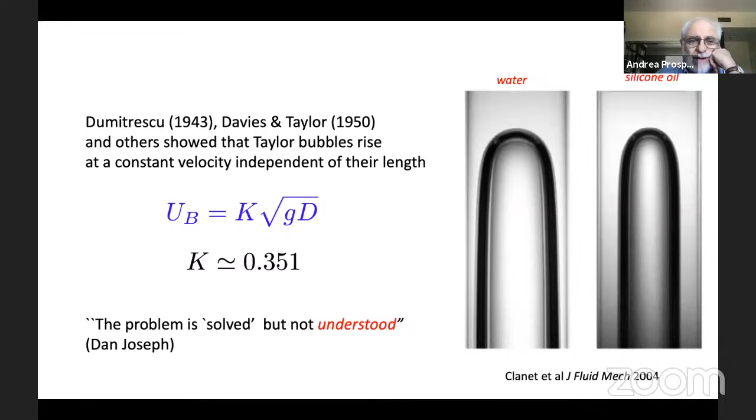But I talked about this with Dan Joseph several times, and as he used to say, the problem is quote unquote 'solved, but not understood.' Let me run over something many of you are quite familiar with, just to remind you why there may be things that still warrant some investigation here.

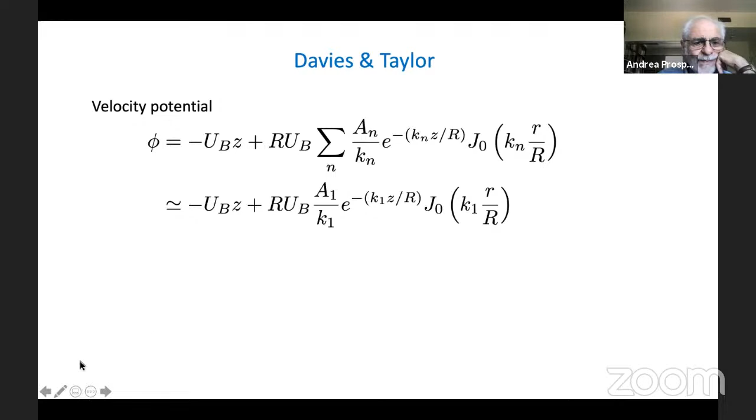So what did Davies and Taylor, and in a more complete way the other workers, do on this topic? They started by assuming a potential flow in the frame of reference where the bubble is at rest, then introduced a brutal approximation of keeping only one term of this infinite series expansion. Then they dealt with the kinematic condition, imposing it near the bubble nose, so this coefficient A1 becomes 1. Then they impose a dynamic condition halfway between the axis of the tube and the outer wall, and this way they find the rise velocity of the bubble.

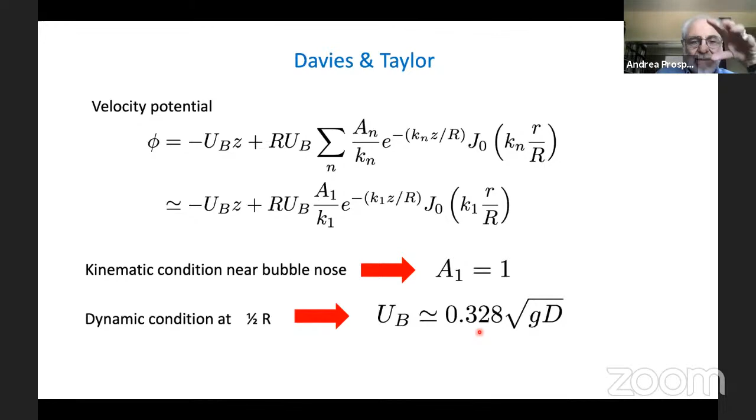Now, this number 0.328 is a little off. Dumitrescu did something similar, but he kept 3 terms in the series and got a better result. But in any event, this is really the background we have on Taylor bubbles, more or less — other people have done other work on this, of course, but this is the basic idea.

So now, what is kind of paradoxical here, as pointed out in a paper in the International Journal of Multiphase Flow by Funada as first author, but really driven by Dan Joseph, is that there are several paradoxical features. The rise velocity is predicted without any dynamic force balance, just from the bubble shape — this is strange. The theory is inviscid, but the buoyancy force is constant, so evidently there must be dissipation. Otherwise the velocity of the bubble should change, but there's no trace of dissipation.

Where is it? And then there's this remarkable property that the rise velocity is independent of the length, but you'd expect the buoyancy force to be proportional to the volume — so what happened to the Archimedes principle? And finally, the rise velocity is independent of how the gas is introduced: is the bottom of the tube open, or is it closed and the gas just introduced at the bottom, or what?

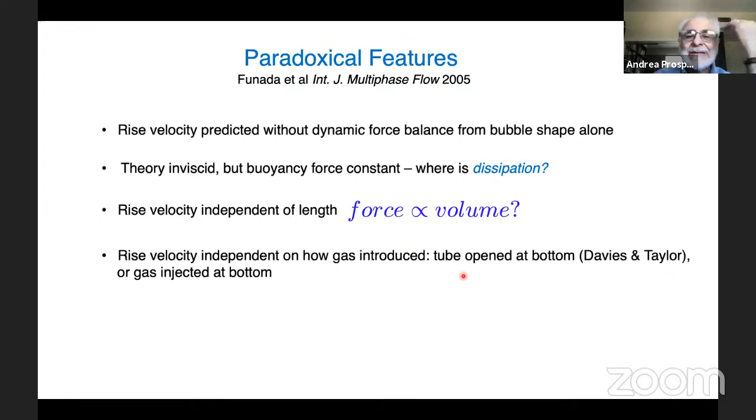So there are other paradoxical features, but these are pretty major ones. If you look around, there is information in the literature that gives you an idea of what might be going on. Let me just mention one paper.

Clanet and others did experiments with polygonal tubes, and they found that the rise velocity is proportional to the square root of the perimeter of the tube. And for a given cross-section, we must increase the perimeter to increase the velocity. That is an interesting idea.

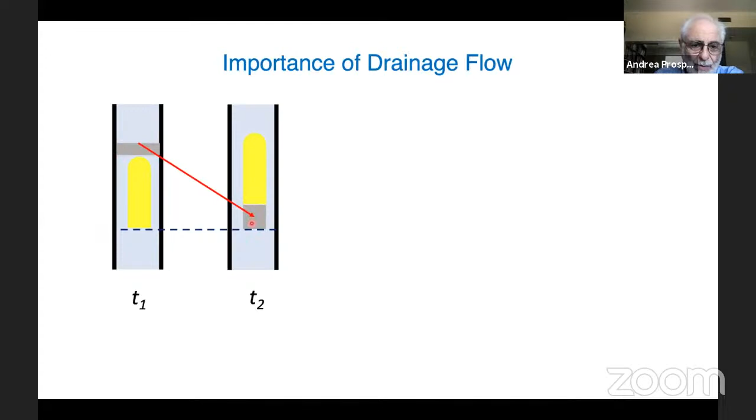Well, if you think about it, there must be something like this going on. Suppose I have a bubble that rises, there is space around the bubble, behind the bubble, that must be filled. So the liquid that fills this space must make its way from above the bubble to behind the bubble. But how does this happen?

Since the bubble pressure is essentially constant, there cannot be any pressure gradient in the film. Because there is no pressure gradient in the film, there really is no communication between the top and the bottom of the bubble. So you can think of this bubble as being a solid object, and you attach a string here and you pull.

Well, what happens? If you pull harder, the pressure below the object will become less, and this lower pressure will increase the flow rate of liquid in the film surrounding the bubble. But this is not possible with a real bubble instead of an object, because the pressure is constant along the bubble and constant in the film, so there cannot be a pressure difference between the top and the bottom of the bubble.

So what happens is that the liquid is in free fall along the bubble sides. Of course, free fall in the sense that gravity is balanced by viscous effects through the no-slip condition along the wall surface. But nevertheless, it is in free fall.

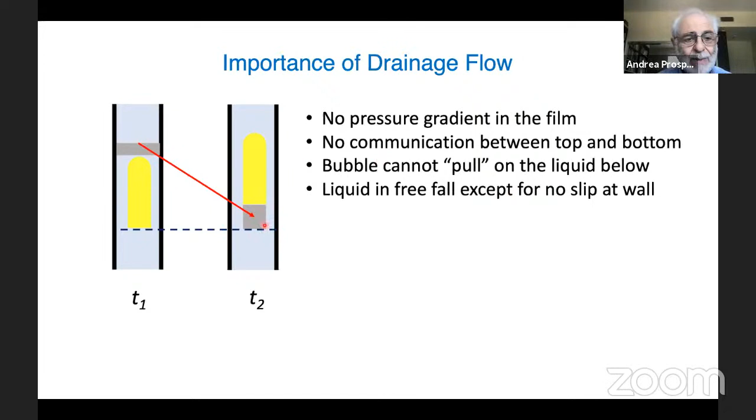Then we start to understand why the length of the bubble is not important, because if the liquid in the film is in free fall, whether the bubble is 10 centimeters long or 50 centimeters long, free fall is free fall. You have this equilibrium between gravity and the no-slip condition, and that is the amount of liquid that can go from the top to the bottom of the bubble. This is what determines the rise velocity of the bubble.

In other words, it's like filling a glass of water. If you want the water level to rise, the only way is to add water from somewhere else. Well, this is what happens here. In order for the bubble to rise, you must add water, just wait for this water to fall down the film and fill the space made available behind the bubble.

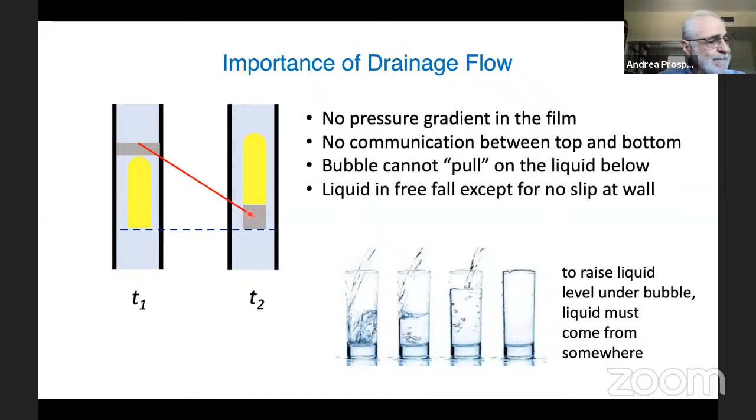Indeed, another indication of this fact in the paper by Clanet is that the constant K decreases as the number of sides of the polygon increases. Why is that? Because if you have a triangular tube, you have a relatively large channel for the liquid to go through. But as you increase the number of sides of the tube, these channels become smaller and smaller.

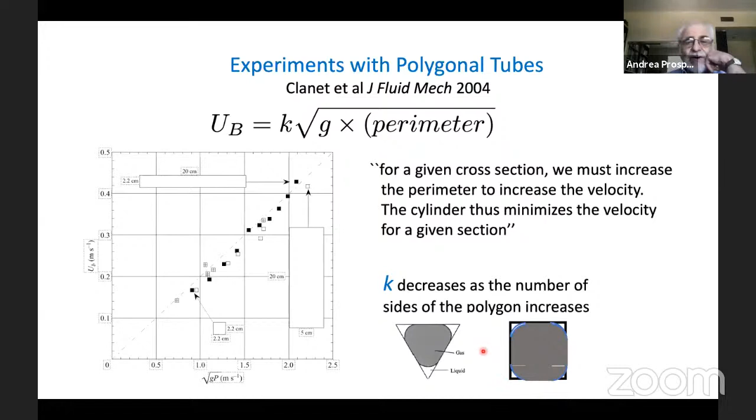Once you understand this, you start thinking and formulate the following thought: suppose that I can enlarge the gap between the bubble and the tube wall. If I manage to do that, would the bubble rise faster?

So this is the question that prompted the study I'm going to briefly describe now. How can I enlarge the gap between the surface of the bubble and the surface of the tube?

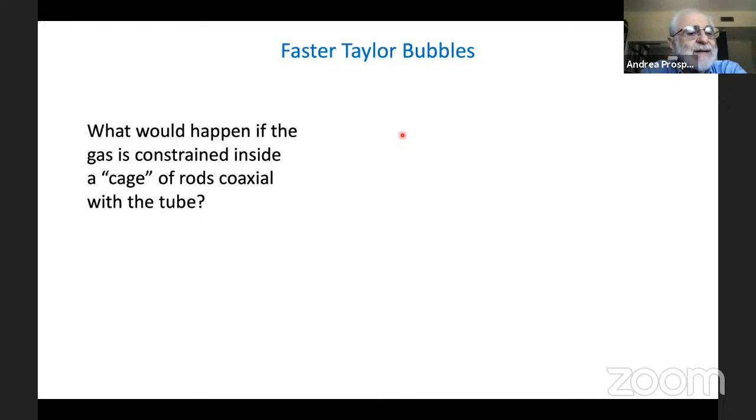An idea would be that we can put a cage of solid rods coaxial with the tube, and we can constrain the bubble inside this cage. So this is what we did.

The Galilei number is not very much, the Morton number is too large, but this is because computation is not probably the best way to address this problem. The best way is to do an experiment, because resolving these small wires and rods with adequate gridding becomes an expensive proposition.

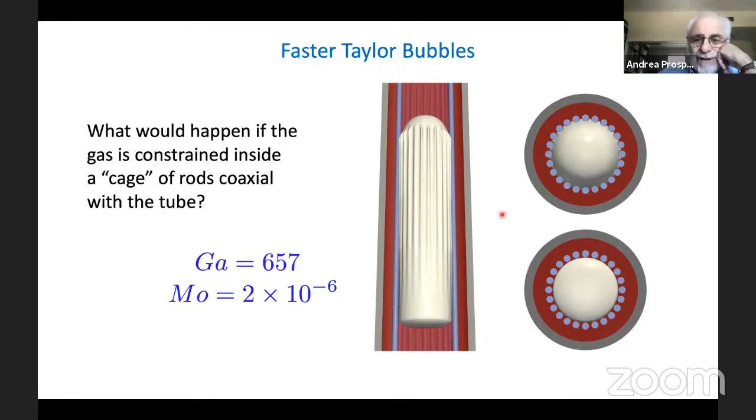Nevertheless, what we try to establish in this paper is whether this principle works or not. And what is kind of remarkable is that this principle works well beyond our fondest expectations.

This horizontal line is the rise velocity of a bubble with those parameters I had before, in a tube without the cage, a normal tube. Now if you put in that cage, you can increase this velocity from about 0.33 to about 0.55. So you are increasing the velocity by well more than 50%.

Now this is not the upper limit. We don't know what the upper limit is, and probably an experiment would be a more suitable way to do this. But this is what we can do. And these various points here are different cases that I will briefly talk to you about later.

But in some cases, it doesn't work. These bubbles actually rise slower than in an empty tube. This bubble, which is a rather remarkable situation, I will show that later. All the other cases, the bubbles rise faster.

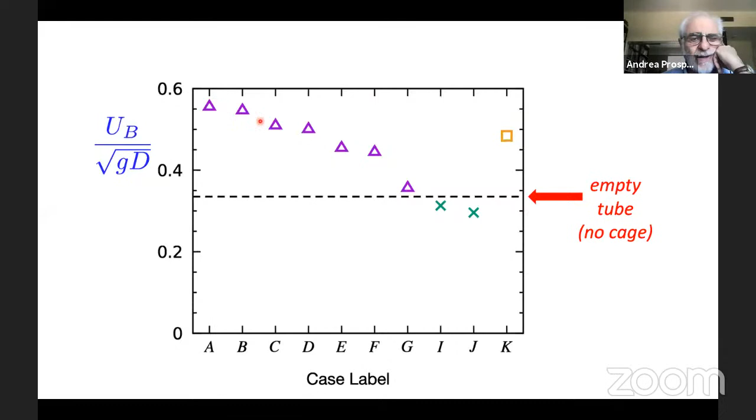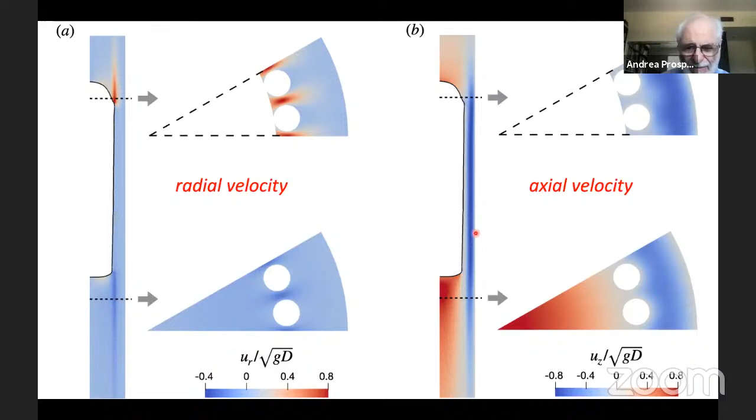So this is another view of what is going on. This is radial velocity on the left. You have a high radial velocity as the bubble rises and pushes the liquid out, and a negative velocity behind the bubble when the liquid is pushed from the annulus into the core of the tube. The axial velocity is positive above and below the bubble, and negative along the annulus, where the liquid must go down to make room for the bubble. So, as I said, there is a pressure gradient along the bubble.

This pressure gradient has the consequence that if you have a very long bubble, the pressure at the top is less than if the bubble is not as long. And because what holds the gas inside the cage is surface tension, a stronger delta P will allow the gas to shoot out a little more than a smaller delta P. Okay, but this is what happens.

So now these are two other examples. In this case, the cage is much denser, and so as you see, the gas does not stick out as much. Also there is a significant effect on the top of the bubble.

And this instead is a net in which, in addition to having rods in the vertical direction, you also have rods in the horizontal direction. This actually looks better because surface tension has two radii of curvature to help you, instead of having only one radius of curvature, as happens essentially here.

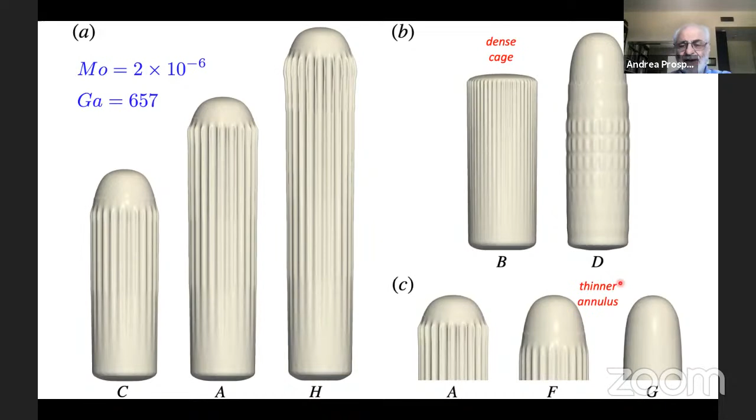Another example here is what happens if you shrink the annulus. If you make it thinner and thinner, the bubble becomes smoother, the pressure gradient becomes smaller, but the rise velocity turns out to be not as strong.

Now, as I said, if what holds the bubble into this cage is surface tension, and if the rods are too thin, the gaps large, surface tension cannot hold the bubble. This is one case that is simulated in which you see this phenomenon. In this case, the bubble does not reach a steady state, but actually keeps accelerating, and so we were not able to include this in that graph of rise velocity.

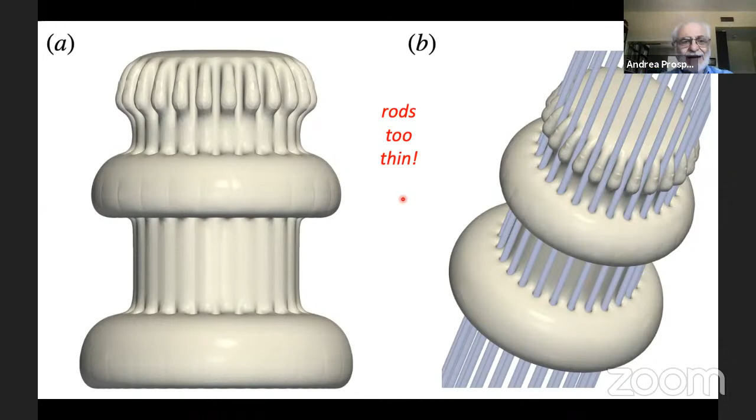Now, this may be kind of useful if you think of a device to remove vapor. If you boil a liquid, the vapor will be generated on the wall of the tube, and therefore it might stay outside. If you want to remove this vapor faster, either to feed a turbine or to limit the danger of burnout, it would be interesting to push this vapor out of the way as much as possible. This is what can be achieved in this way.

Now, there are other ways to increase the rise velocity of bubbles. One obvious way is to use a bigger tube - that's trivial. But another interesting way is to tilt the tube a little bit. If you tilt the tube, you lose axial symmetry, and what happens is that the bubble is pushed towards the upper part of the tube surface, and the gap between the bubble surface and the tube wall gets larger - that's why the bubble rises faster when you tilt the tube.

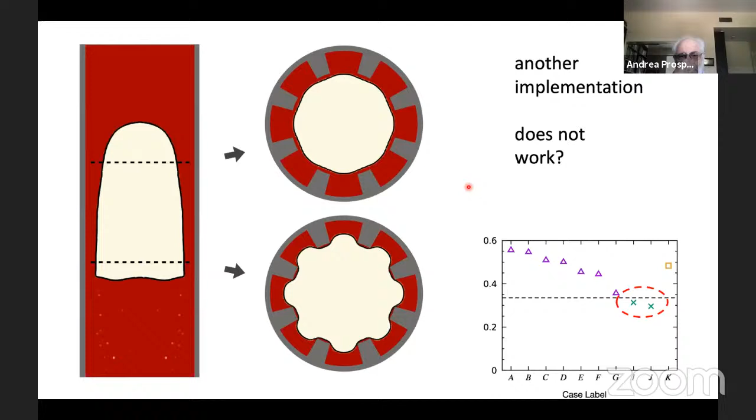Okay, so this concludes the first topic of this presentation. And let me move on to the second topic.

Now, this is the dangers of Taylor bubbles. And this work is joint with Dr. Zhu, and also the second paper with other colleagues at the University of Houston.

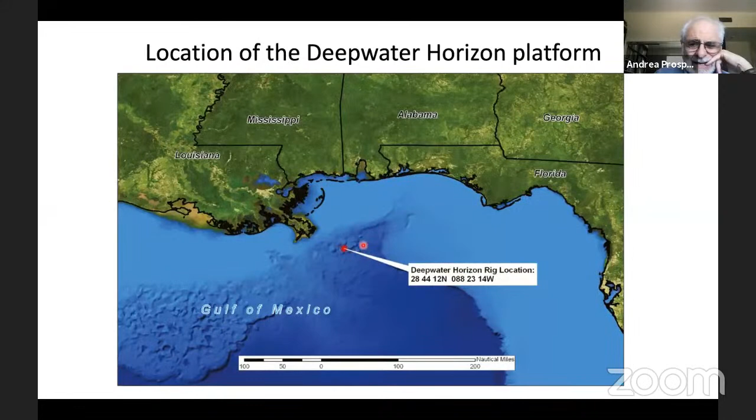Some of you may not be familiar with this idea, so let me remind you of a major accident that happened about a decade ago. Actually, it is the anniversary today - it was April 20, 11 years ago. There was this drilling rig called the Deepwater Horizon, which essentially exploded on April 20 in 2010. This was located near the promontory where New Orleans is, and this is where the Deepwater Horizon was anchored - that's where the accident happened.

And there were, as the witnesses said, at about 10 p.m., the rig unexpectedly began to shake, and the loud surging noise was accompanied by natural gas, drilling mud, and seawater that shot high above the floor of the drill ship. The gas exploded, and the rig was engulfed in flames. It was a tragic event.

There were 11 dead. There was, for nearly 3 months, an uncontrolled oil leak at the bottom of the ocean, and there were 500,000 cubic meters of oil that spilled and contaminated the water, beach, and environment for a long time.

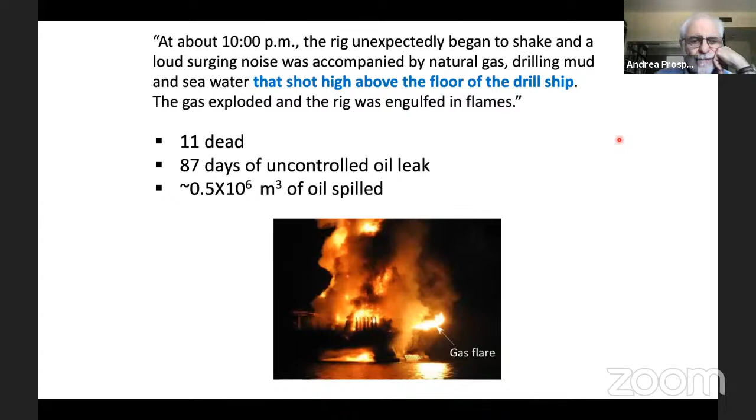So what happens is what people call the kicks in the oil industry. When you drill an oil well, what you do is push down into this, called the drill string, a heavy liquid that is either a suspension of sand and water, or a suspension of oil and water.

The role of this liquid has several functions. One is to lubricate the drilling bit down here. The other is to maintain a high pressure at the bottom of the well. And the third role is that when this drilling mud, as it is called, gets back up on the outside of this riser, it carries with it the cuttings that the drill bit generates at the bottom of the well.

Now, what can happen is that for unexpected reasons, this drill bit punctures a region of rock where the pressure is much higher than elsewhere. When that happens, you get an inflow of fluid from the formation into the riser, and this fluid rises. If the fluid is liquid, not much happens—there's no particular problem. But if the fluid is gas, you can get a very major effect, and that is what is called a gas kick, as I was saying before.

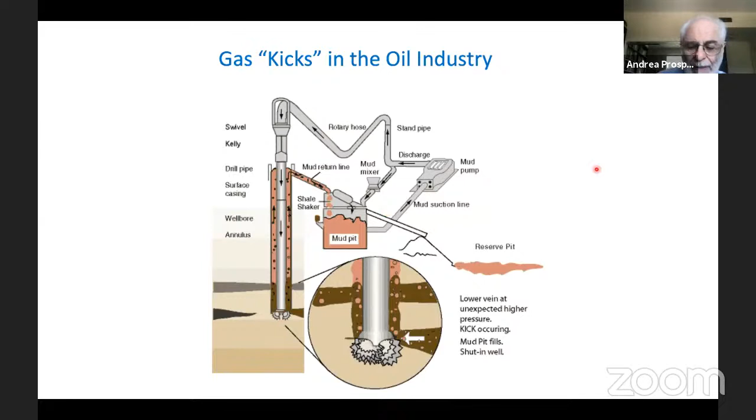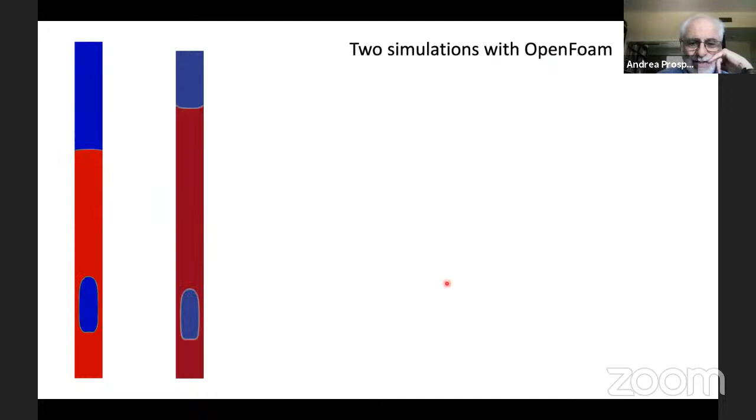Let me show two simulations done with OpenFOAM. One thing to appreciate here is that the base of the bubble rises at a constant velocity, which goes back to what we were talking about before. But the top of the bubble rises at a much faster velocity—or rather, can rise at a much faster velocity. We'll see the implications of this in a minute.

So what happens? Let me give you a very simple explanation first. This is too simple, really, in some way, but I will add to it as we go along. Suppose that you have a 1 meter long bubble at 1600 meters depth.

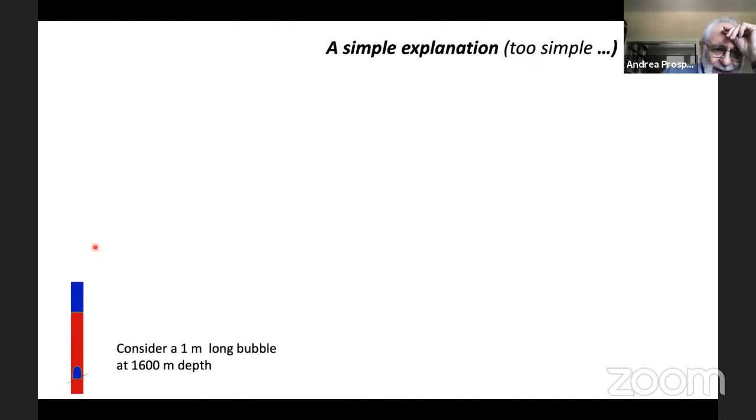By the time the bubble has risen to 800 meters, it is about 2 meters long because the hydrostatic pressure has fallen. And when it has risen to 400 meter depth, the bubble is now 4 meters long, but the time between 800 and 400 is about half the time between 1600 and 800.

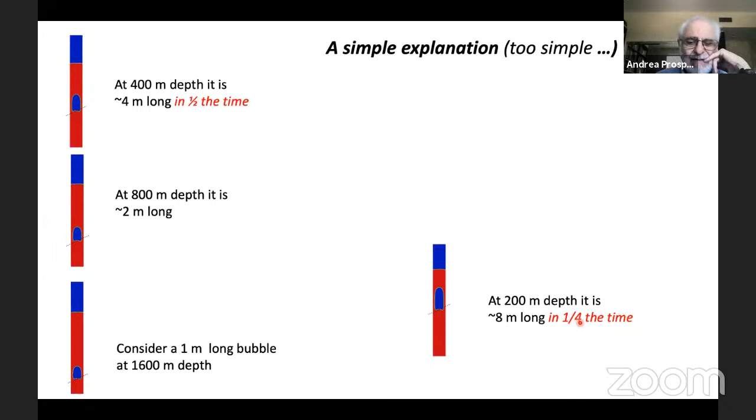So when the bubble has gone from 400 to 200, it is now 8 meters long, and the time it takes is a quarter. And you see what happens: when the bubble is at 100 meters depth, it is 16 meters long, and it takes an eighth of the time.

Notice that between 200 and 100 meters, this bubble must expel from the top of the riser a column of liquid which is 8 meters long, because the bubble will expand. So as the bubble rises and expands, the liquid that must accommodate the expansion must come out from the top of the riser faster and faster, because the time it takes for a bubble to halve its depth becomes smaller and smaller.

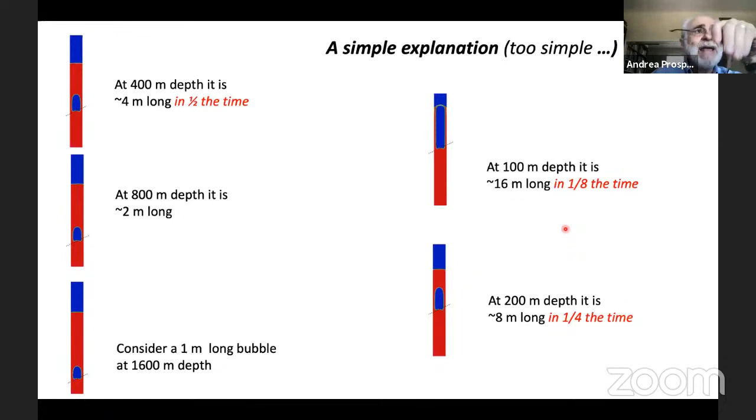Now, this is one of the ingredients that causes this very rapid ejection of liquid at the top of the riser if you're not careful. But there is actually another phenomenon that is an instability, and the way one can explain the instability very simply is the following.

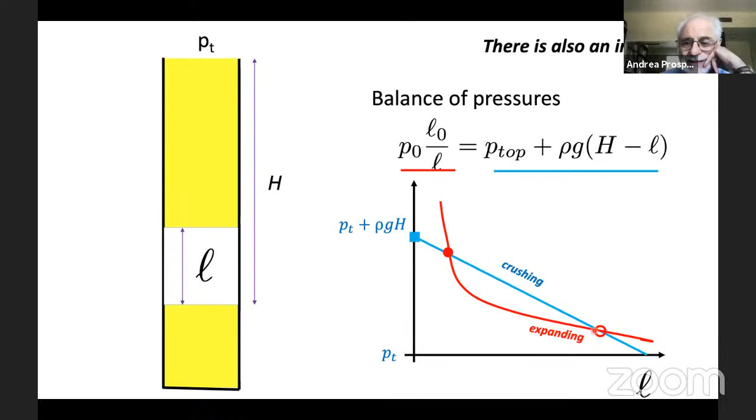These two solutions are very different. If you consider this solution here and imagine the bubble getting a little longer, the crushing pressure becomes much bigger than the expanding pressure, and therefore this equilibrium solution is stable.

But if you look at this other solution and imagine expanding the bubble a little bit, the expanding force becomes much more powerful than the crushing force, so the bubble will continue to expand. Because of this, this solution is unstable, whereas the other one is stable.

Now, what happens as the bubble rises? As the bubble rises, the two solutions get closer to each other, and at some point a situation is reached where the two solutions coalesce, and this single solution becomes unstable. This may or may not happen.

It depends on the particular parameters, but these two phenomena are at the root of these devastating gas kick events. One is that the bubble expands more and more, faster and faster, because as it rises the hydrostatic load decreases. Second, you have this instability that can make even a small, physiological expansion of the bubble grow much faster.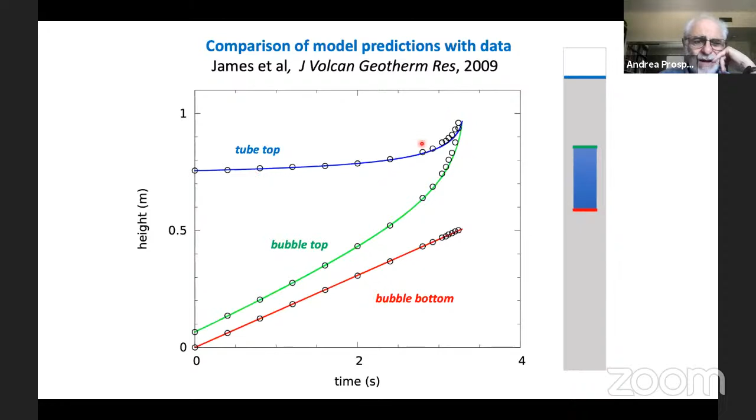These volcanology researchers did an experiment with a tube open to the atmosphere at the top, where the pressure was kept low, and they recorded the rise of the bubble base, the rise of the bubble top, and the rise of the free surface of the water in the tube. As you see, our calculation seems to catch what is going on reasonably well.

But let me show you some predictions. This is a typical example: we take a 1 meter long bubble and release it at a kilometer depth. This line is actually two lines—the blue line is the top of the bubble, and the red line is the bottom. As you see, for maybe 45 minutes, nothing much happens.

Now let us focus on this particular time interval, shown in the right-hand side image. Here the top of the bubble starts moving faster than the bottom, and notice this happens in the last 3 or 4 minutes. So, for 45 minutes nothing happens, but in the last 3 or 4 minutes, this is what happens.

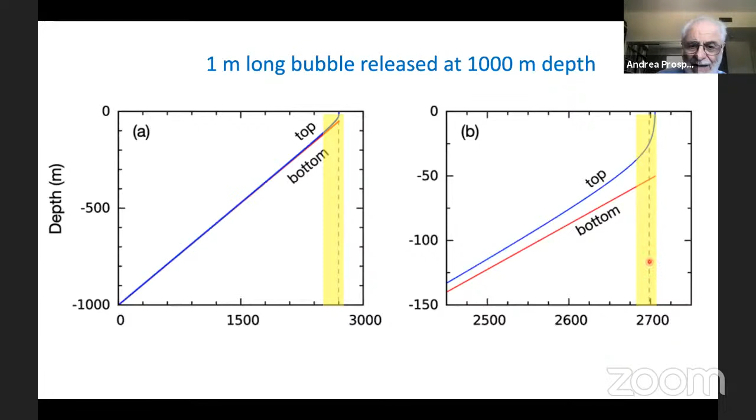But what is striking is what happens in the last 30 seconds: the velocity of the liquid at the top of the riser goes from a few centimeters per second to more than 10 meters per second. Notice these are seconds—about 25 seconds—and they happen 45 minutes after the gas first enters the bottom of the riser.

Now, if you do not realize that something is happening in your riser—that you have gas and potential danger—by the time you start realizing what is happening, it's way too late, and you cannot take any mitigating action. This is actually what happened in the Deepwater Horizon accident.

There was an undetected gas kick that rose undetected in the riser, and it went unstable and started to eject this column of gas and hydrocarbons at the top of the riser. There were sparks around, and so this material burst into flames, with the tragic consequences that happened.

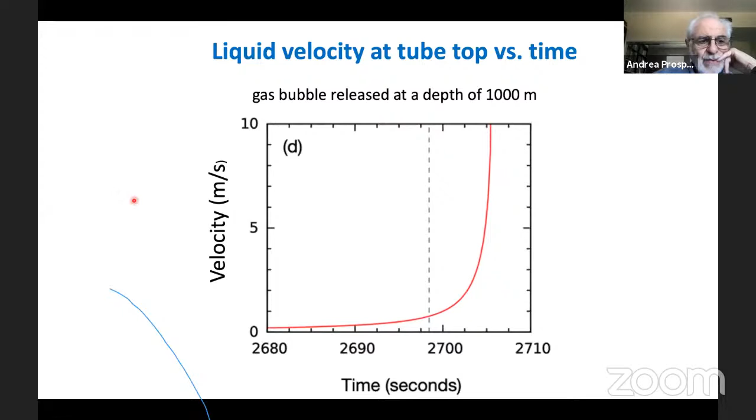So what does the oil industry do about this? The current methods of kick detection are rather pitiful once you realize the extreme rapidity of the event. The pits are the reservoirs for the mud, so they look at the amount of mud in the pit, and if it starts rising, that means mud is being ejected from the top of the riser, so something untoward is happening. That's correct in principle, except the pits are very large, so you have to wait a long time to notice the level increasing. Also, the ejection of liquid from the top of the riser is actually pretty slow until all hell breaks loose.

You can also look at delta flow, which is the difference between the mud that is pumped into the drill string and the mud that comes out from the riser. But again, you can have compressibility effects and other reasons that cause a difference between the two flows, so this is imprecise, and it also takes a long time.

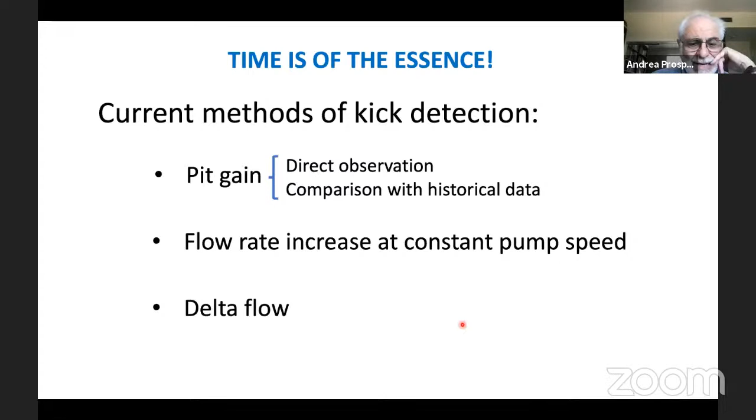So one outcome of our work was a new method for gas kick detection. Speaking to a multi-phase flow audience, I must recognize this idea was already implemented in our community, but for different purposes - to detect different flow regimes in a two-phase gas-liquid flow. They looked at the pressure difference between two points along the tube to decide whether it was bubbly flow, slug flow, or annular flow.

So if you look at the pressure, suppose this is your riser and you have a few pressure sensors arranged along it. If you focus on one of these sensors, the pressure remains constant for a while. When the bubble starts arriving, the pressure starts falling because now above the sensor you have gas in addition to liquid, so the hydrostatic load is less than before. This is what happens for all these pressure sensors.

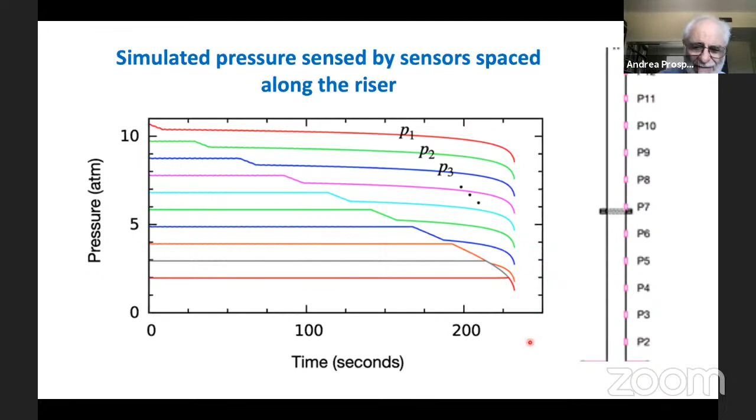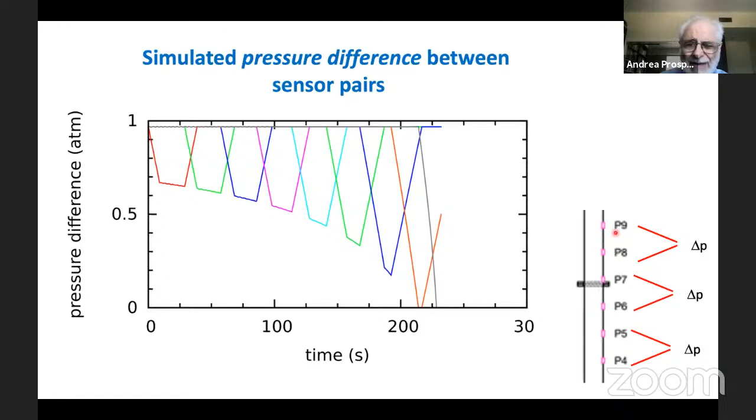This is a signal that tells you something is happening, but there's a better way to exploit it: look at the pressure difference between pairs of sensors. As long as the bubble is under a particular pair, the pressure difference will be something constant - in this simulation, one atmosphere. When the bubble starts arriving, it penetrates past the lower sensor and the pressure difference starts to fall. As the bubble rises between the two sensors, it expands, so the pressure falls further. As it passes the top sensor, the pressure recovers. So this is a rather unique signature of the pressure difference when you have gas between two sensors.

So we did a little demonstration - rather, our colleagues at the University of Houston did it. This is a tube where a bubble is injected at the lower end and rises, with pressure sensors along the tube. When you inject the bubble, there is a mess of oscillations in the pressure readings because the gas was pressurized, so you get oscillations of this bubble as it rises.

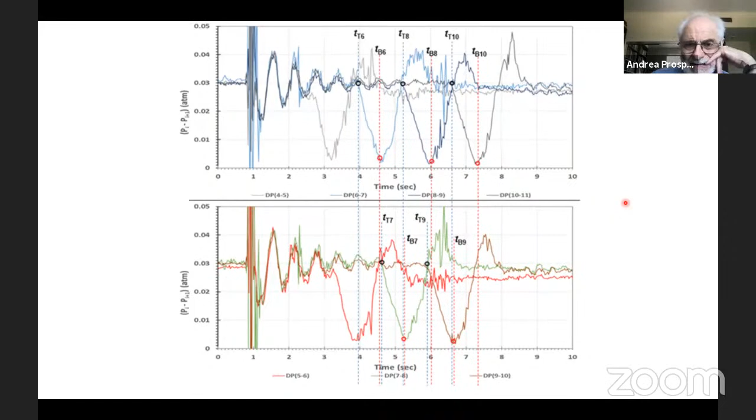But in spite of these oscillations, if you look at the pressure difference, you see exactly that characteristic pattern I showed before: the bubble rises, passes the first sensor, the pressure difference starts falling, and then as it passes the second sensor, the pressure difference starts rising. So this is a piece of work that has generated some interest in the oil industry, and we will see what happens with it.

So let me come to the last topic, which is an instability of Taylor bubbles.

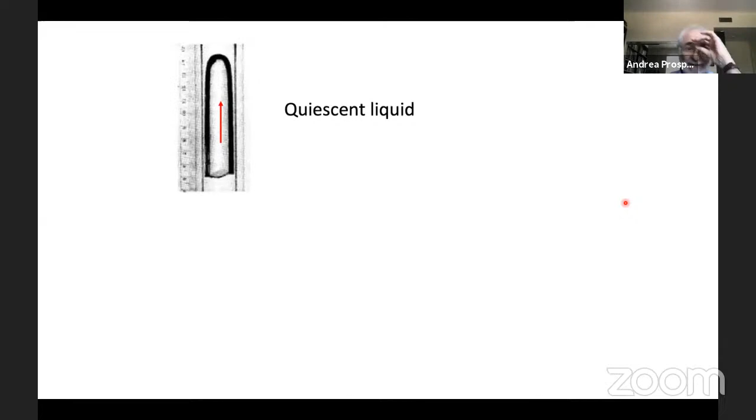What I'm talking about is the fact that if you have a Taylor bubble rising in a quiescent liquid, well, you have what everybody knows. But if the liquid is in downflow, the bubble is not axisymmetric anymore—it develops a nose that hugs one of the walls of the tube.

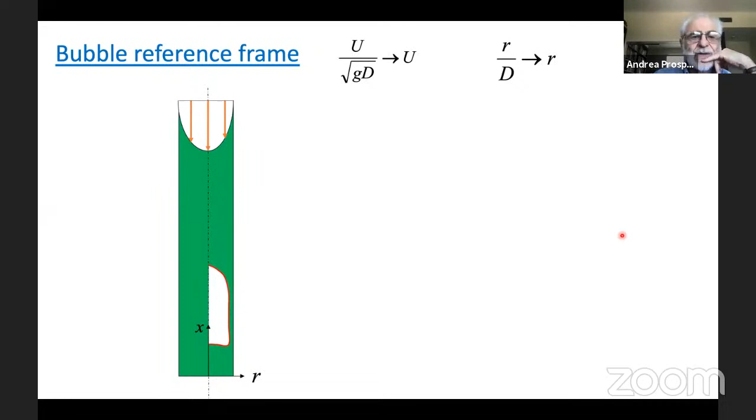I got curious about how this would happen. This is work I did with a former student quite some time ago. So I followed the work of Taylor and others, in particular Collins, who used a viscous flow for the downward flow in the tube, but introduced a potential model to account for the bubble. It's a hybrid, an unholy alliance between viscous and inviscid tools of fluid mechanics, but they were able to find something very similar to the drift-flux model.

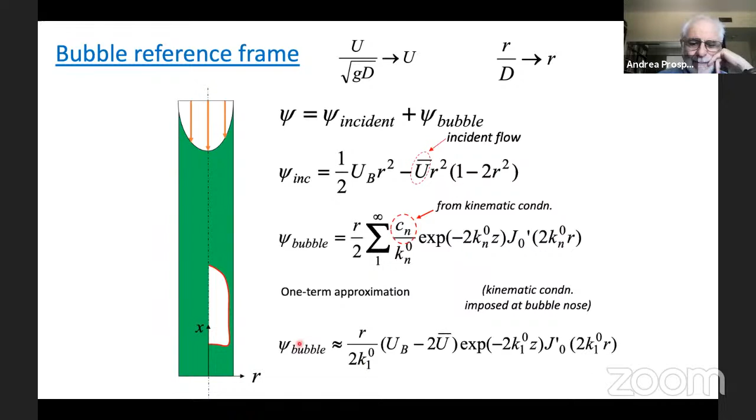As G.I. Taylor and Dumitrescu did, they took the stream function, truncated the summation, and kept only one term. If you do this and then impose the dynamic boundary condition on the axis of the tube, you come up with a prediction of the rise velocity of the bubble as a function of the velocity of the liquid in the tube.

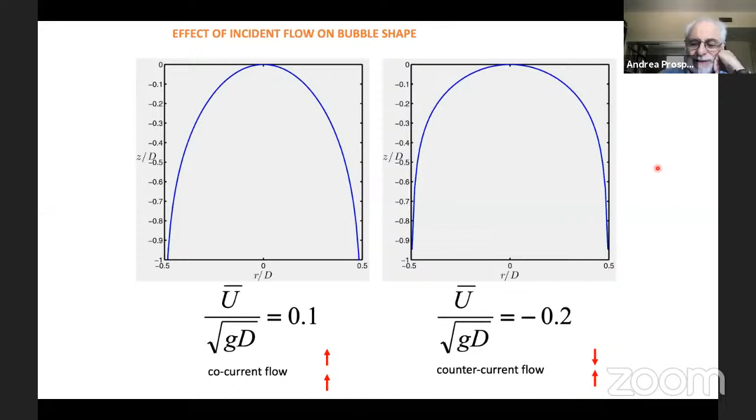So we tried to understand the stability issue. One thing that put us on the trail of a possible answer is that if you have co-current flow, the bubble is pointed, whereas if you have countercurrent flow, the bubble is much flatter. We will see that this is really at the root of this instability.

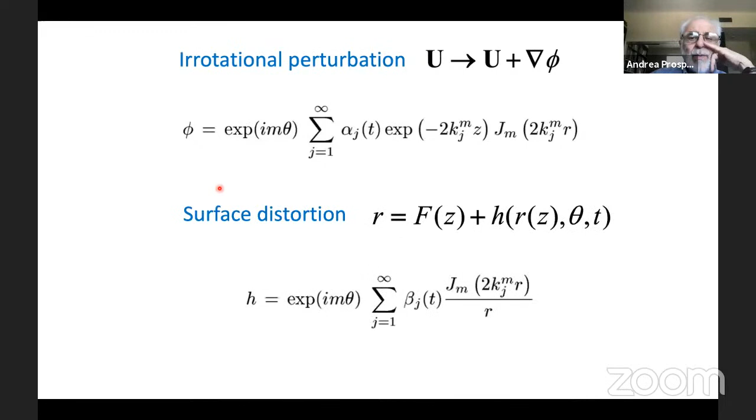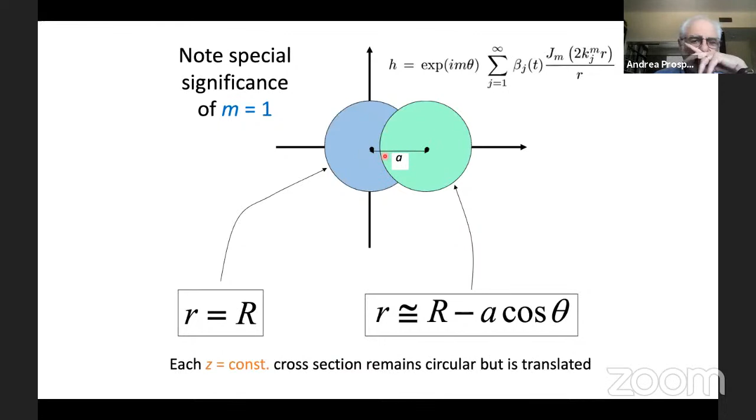In particular, what's important is m equal to 1. If you put m equal to 1, you can simulate a bubble whose axis would normally be concentric with the axis of the tube, but instead you find a bubble with its axis displaced from the axis of the tube. So you can account for this deformation I was interested in—this distortion from axisymmetric to a sideways shape—by introducing a perturbation like this.

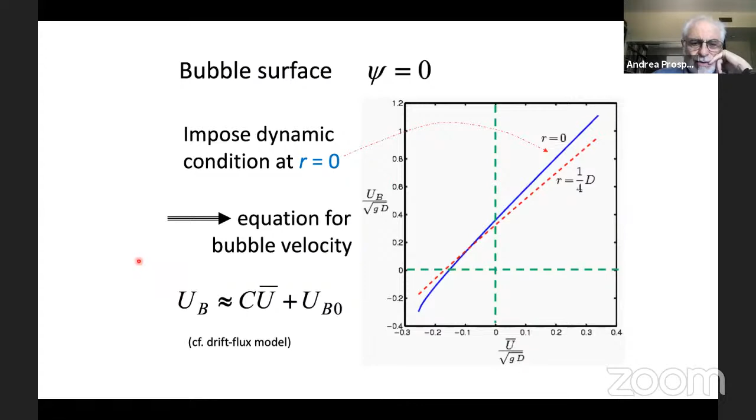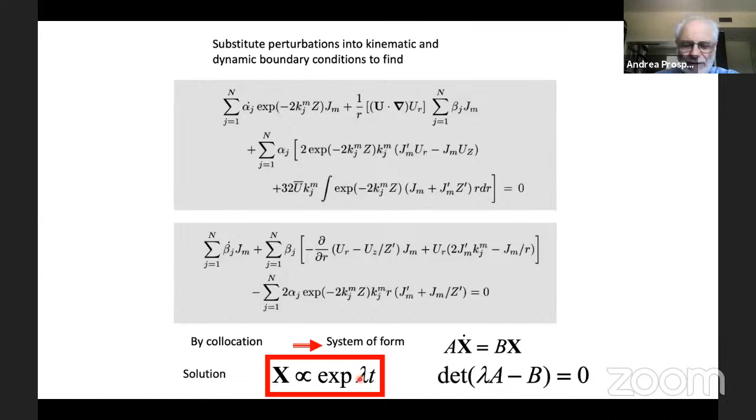What we find, without going into the details, is an eigenvalue problem in which everything depends on time according to an exponential, and lambda is the eigenvalue. Of course, if lambda is positive, the system is unstable.

But the question is why? Actually, there's a better question: why is the bubble ever stable? In the end, you always have a Rayleigh-Taylor instability, right? We have light gas under heavy liquid, so why is the bubble ever stable at all? Why doesn't it rain through the roof of the bubble? Well, there are several reasons. One is that the perturbations formed on the bubble surface, as they propagate around the bubble, get stretched.

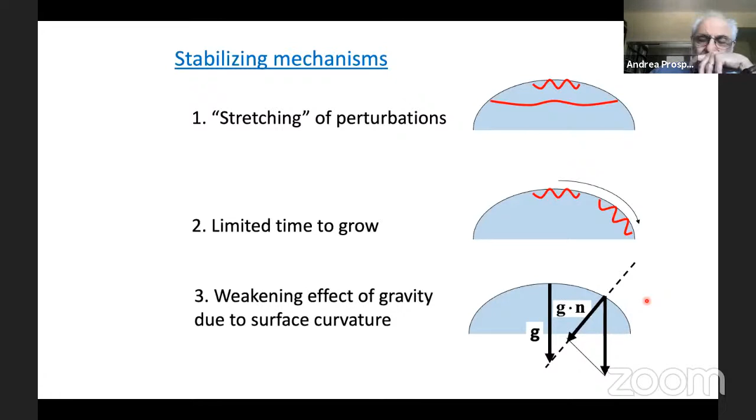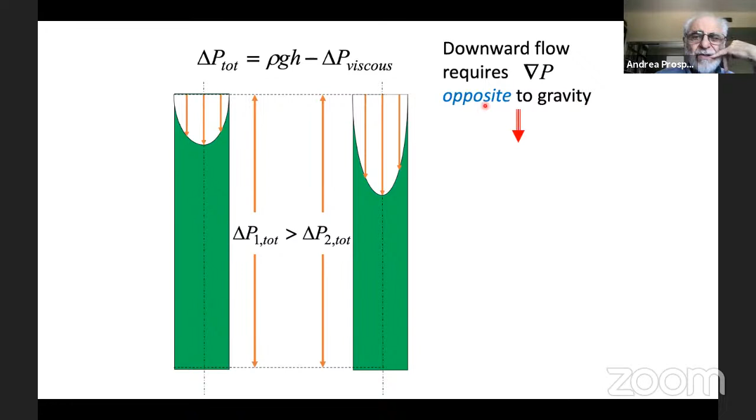Now what happens if you have a downward flow? In a downward flow, you have the total delta P, made of a gravitational part and the viscous part that you need to impose to push the liquid down. The downward flow requires a delta P that is opposite to gravity, and as a consequence, the fluid relative velocity is smaller, so the interface flattens, as I showed before.

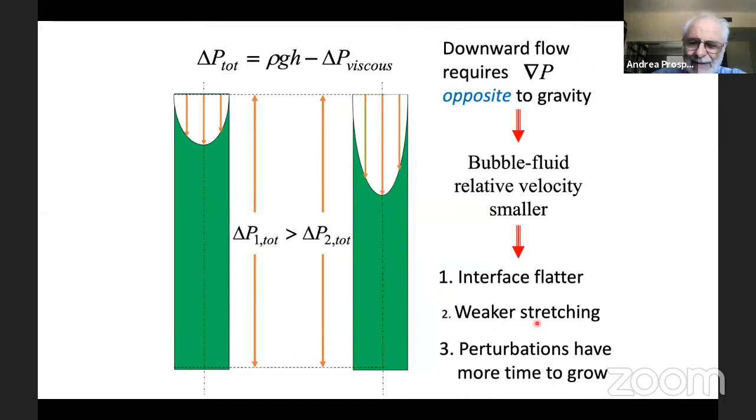So what are the consequences of this? Well, the Rayleigh-Taylor instability is strengthened because you have a flatter surface, a lower velocity, and this stretching decreased by the physics of the flow.

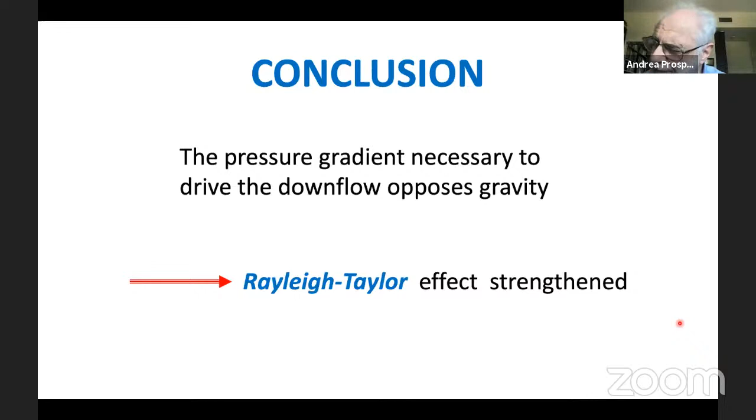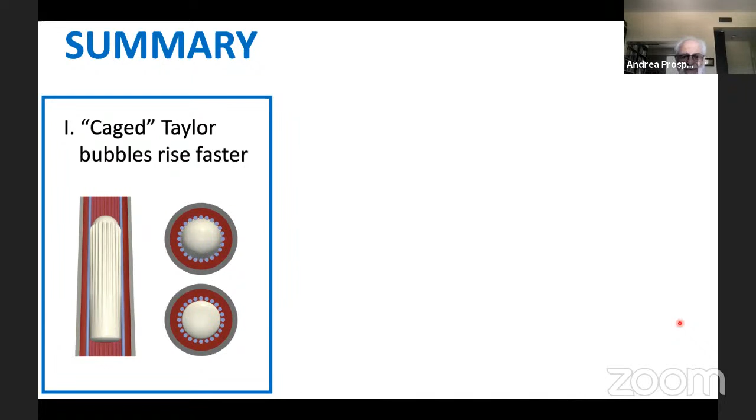Now let me conclude the presentation and remind you of three topics I addressed. One is that the caged Taylor bubbles rise faster. The other one is that there are dangers when a Taylor bubble enters the riser in a drilling operation.

Because you have this velocity of ejection of the hydrocarbons out of the top of the tube that can go from centimeters per second to 10 meters per second within a space of maybe 10 or 20 seconds. And if you do not realize that you have gas in your riser, you are in very serious, indeed mortal danger.

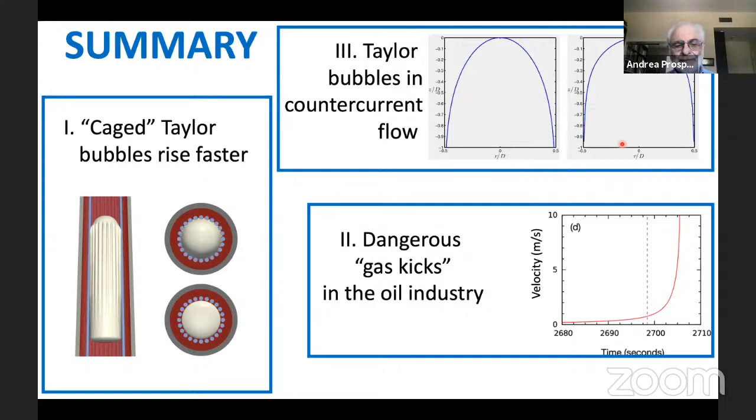And then the last thing I talked about was the stability of the axial symmetry for Taylor bubbles in countercurrent flow. I tried to explain how and why this axial symmetry becomes unstable if you have fluid pushing down and flattening the bubble top. And with this, I will stop, and I'll be happy to answer any question.

Andrea, thanks for a very interesting talk. I know that when someone moves to the state of Texas, the oil industry owns you. I now realize that that is indeed true, that you're working for the oil industry. Okay.

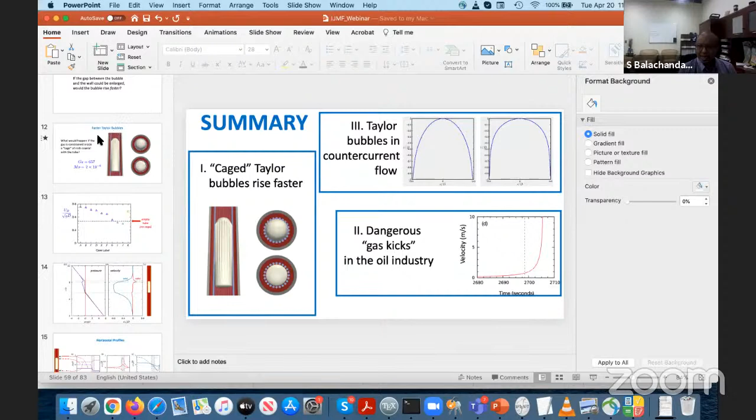Andrea, thank you. We have two related questions, I'm going to read them for you. The first question says: caged Taylor bubbles rise faster - is this conclusion valid in general for fluids with different Morton or Eotvos numbers? In a similar question, Marco Marengo from the UK asks - suspecting that surface wettability of the rods, which you talked about from a surface tension point of view, will have an effect - can you comment on that? Those were the two questions that I combined.

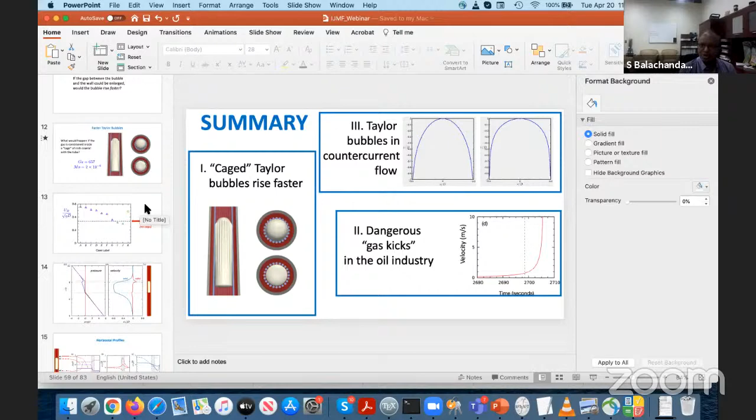Well, these are both interesting questions, and yes. So addressing first the effect of parameters - as I said, because of computational limitations, we could not simulate water, and for water the Morton number is 10 to the minus 12. So what we have here is a rather viscous fluid, a relatively low Reynolds number. Yet what we find is an effect that is pretty strong.

So the basic principle is that no matter what liquid you have, you always have this limitation: what limits the rise velocity of the bubble is the relocation of liquid from above the bubble to below it. Because you always have a zero pressure gradient along the bubble surface, the rising bubble can never pull more liquid down. So no matter the physical properties of the liquid, the fall of liquid along this film is totally established by a balance between no slip at the wall and gravity, nothing else. So any way you can increase this flow rate will give you a bigger rise velocity of the bubble.

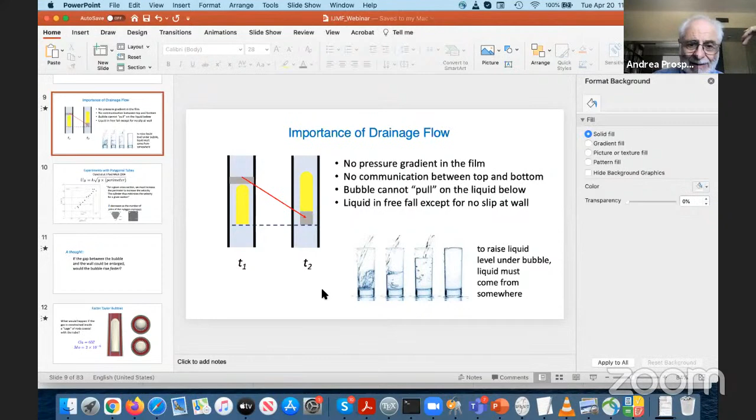Now, of course, if you have a very viscous liquid, it could well be that adding these solid rods on the bubble surface increases viscous dissipation so much that the effect is lost, actually becoming counterproductive. We don't know, and that is conceivable. But for normal liquids, I think the effect should be pretty robust and should be there. Of course, it depends on surface tension — if the surface tension is too low, maybe this trick doesn't work.

Now, coming to wettability, which is an excellent question as well, is of course crucial. In these simulations we've assumed a fully wetted solid surface, but there are lots of coatings available in the chemical industry, so it should be possible to render many solid-liquid pairs fully wettable with respect to the liquid of interest. Once you do that, the affinity of the solid for the liquid becomes much greater, and there is a thin liquid film around these rods that protects them from drying up due to the gas. Once you have that, surface tension is instrumental in holding the gas where it is.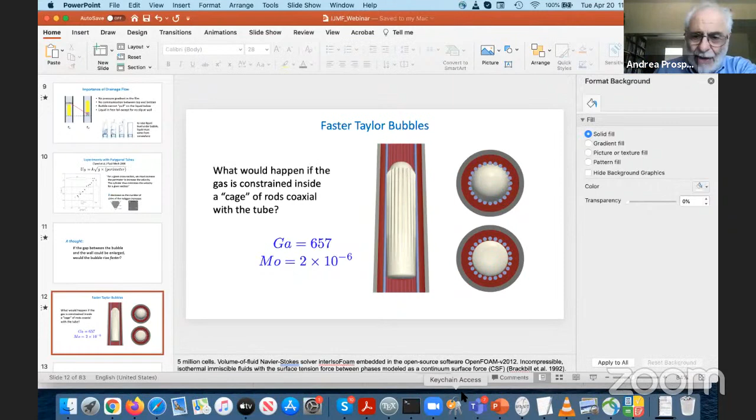Bala, can you help me with the second part of the question — the diameter of the cage versus the diameter of the pipe? Yes, as you already said, that is an optimization matter. We have done several simulations changing the parameters, and we have some limited experience making the annulus narrower — these two data points here are for a narrower annulus. It looks like if the annulus is wider, you get a better increase in velocity. Of course, if you make the annulus very wide, at some point this increase in rise velocity has to saturate and become constant. We haven't tried that, for computational reasons, and also because this should really be investigated experimentally rather than computationally to be efficient in this research.

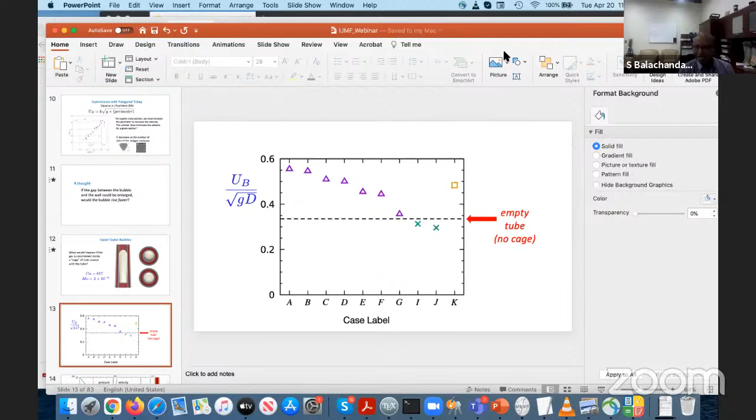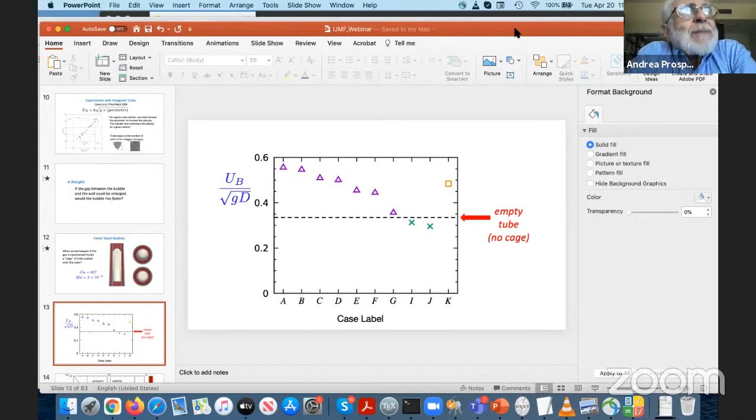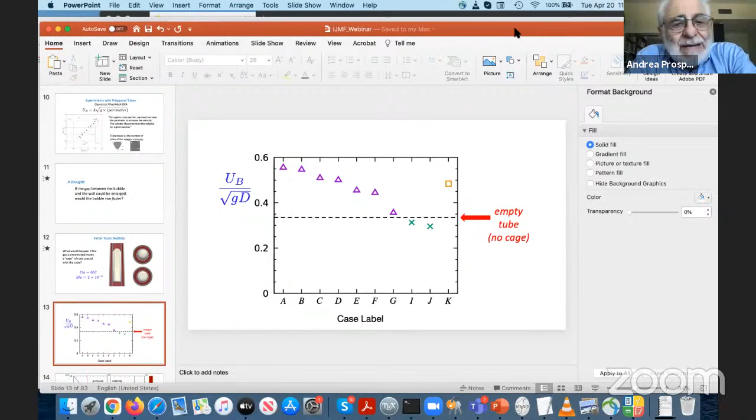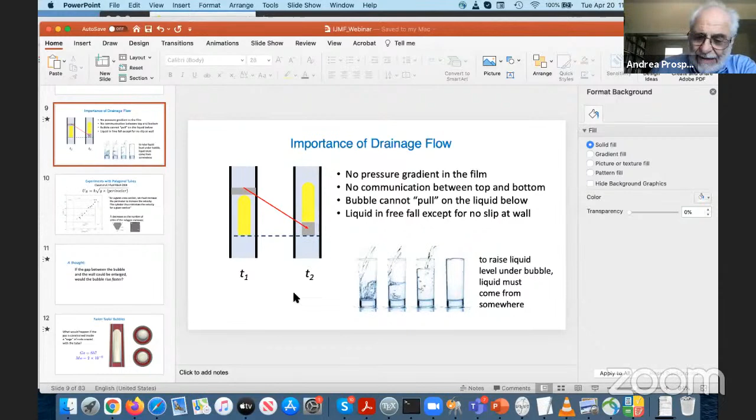I am not entirely sure, but in some sense the Taylor bubble short circuits the pressure, or rather impedes the pressure transmission. By preventing any pressure communication between the liquid above and the liquid below, you basically suspend the pressure gradient when you have a Taylor bubble. As I showed in the graph, inside the tube you have a constant pressure in the region occupied by a Taylor bubble. So I imagine there might be situations where this is useful, but I'm afraid I don't know enough to come up with a plausible scenario. I'd be very interested in understanding this better, and if the person who asked is kind enough to send me an email, I'd be very interested in what he has to say.